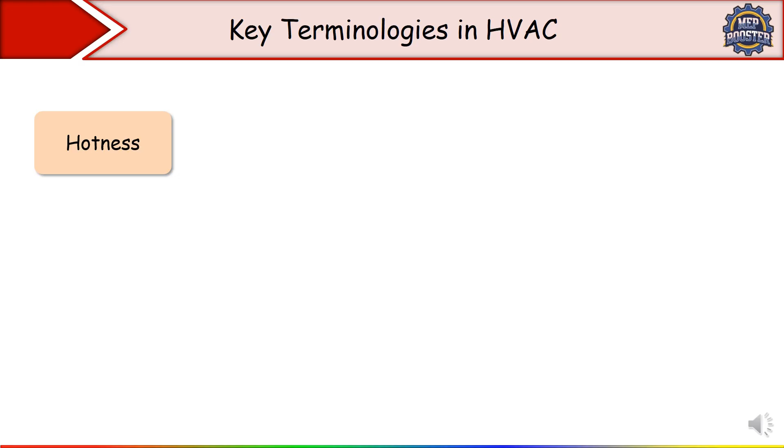Now the first term is hotness. Hotness is important for maintaining indoor climate control, ensuring that spaces do not become uncomfortably warm, especially during hot weather. Hotness generally refers to a high temperature that can affect the thermal comfort of an individual in a given environment. It is a subjective perception of temperature, usually associated with temperatures significantly higher than the average comfortable range, typically around 68 to 72 degrees Fahrenheit or 20 to 22 degrees Celsius.

Let's see an example of hotness in HVAC. Consider a commercial office building during a summer heat wave where the outside temperature reaches 95 degrees Fahrenheit. Without adequate air conditioning, the indoor temperature can rise quickly, leading to discomfort for employees. So if you are using the HVAC system, it is designed to maintain indoor temperature around 72 degrees Fahrenheit for human comfort.

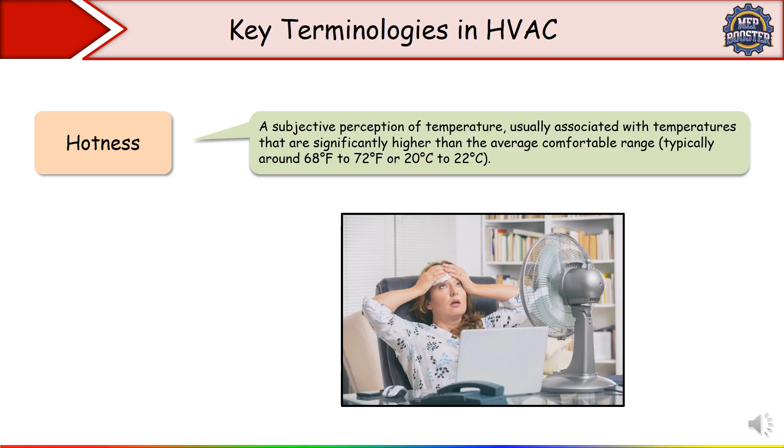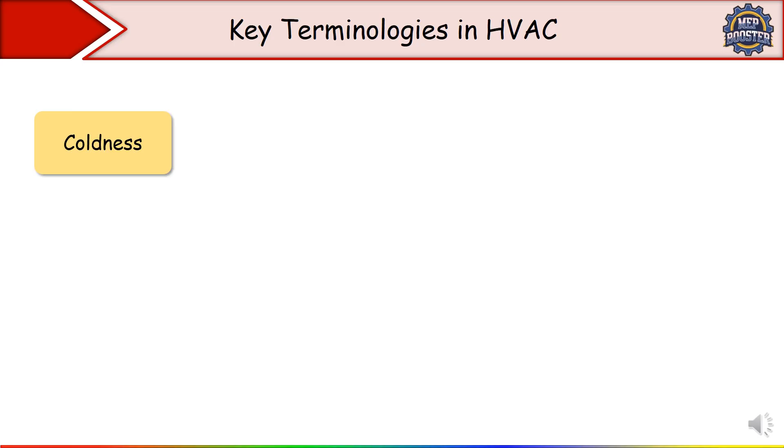Now the next term is coldness. Coldness refers to a low temperature that can affect thermal comfort and indoor climate. It is a subjective perception of temperature, usually associated with temperatures significantly lower than the average comfortable range, typically around 68 to 72 degrees Fahrenheit or 20 to 22 degrees Celsius.

Let's see an example of coldness in HVAC. Consider a residential building in a region where outdoor temperature drops to 30 degrees Fahrenheit, which is minus 1 degree Celsius, during winter. Without adequate heating, the indoor temperature can also drop, leading to discomfort for residents. So the HVAC system is set to maintain an indoor temperature of 70 degrees Fahrenheit, to maintain a comfortable environment in the room.

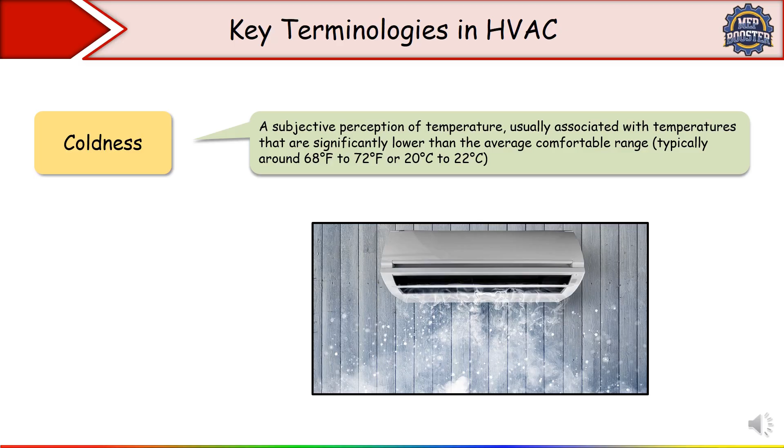Now the next term is humidification. Humidification is the process of adding moisture to the air to increase relative humidity. This is essential in climates where air tends to be dry, as it helps maintain comfort and prevent respiratory issues.

The best example of humidification: in winter, when indoor air can become very dry due to the heating system, a humidifier may be used to increase humidity level from 20% to a more comfortable 40%, reducing dry skin and respiratory discomfort.

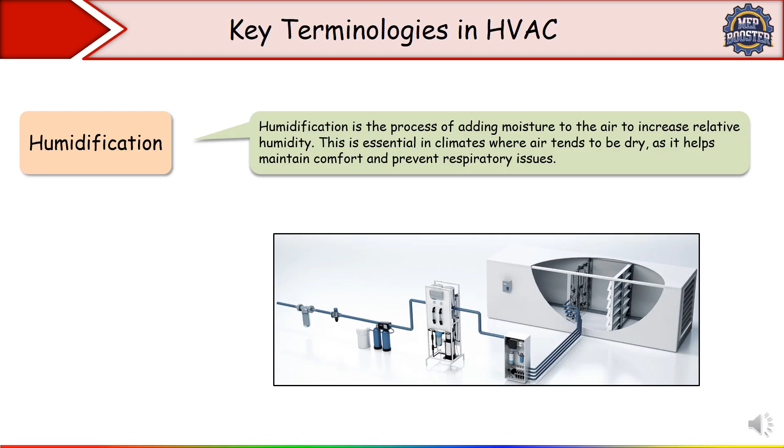Next term is dehumidification. Dehumidification is the process of removing moisture from the air to decrease relative humidity. This is important in humid climates to prevent mold growth, condensation and discomfort.

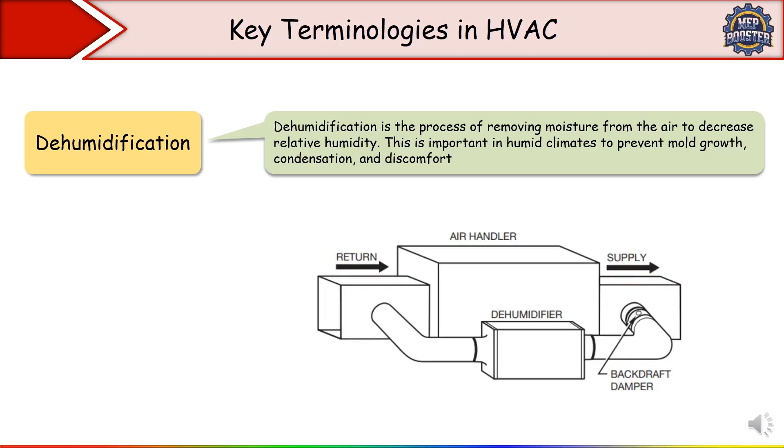In a humid climate, a dehumidifier is used in a basement to reduce humidity level from, let's say, 70% to 50%, helping to prevent mold and improving overall comfort. So this is all about dehumidification.

Now the next term which we have to discuss is evaporation. Evaporation is the process in which liquid water turns into vapor. It occurs when molecules at the surface of the liquid gain enough energy to escape into the air, and this process cools the surrounding environment.

Let's see one example. When sweat evaporates from the skin, it cools the body. So if the temperature is 85 degrees Fahrenheit and the relative humidity is low, the body feels cooler due to the evaporation of sweat.

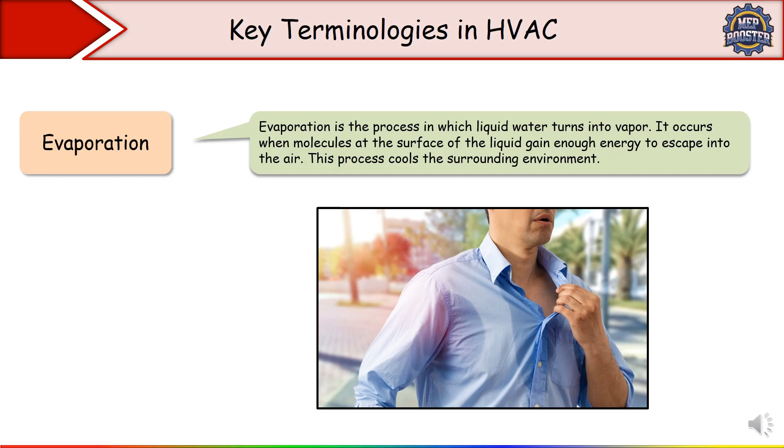Now the next term is condensation. Condensation is the process where water vapor in the air turns back into liquid water. This usually occurs when the air cools to a temperature below its dew point.

Suppose, for example, when warm, humid air comes into contact with a cold surface, like a glass of iced water. What happens? Water droplets form on the outside of the glass. This is condensation, which happens because the air near the glass cools and cannot hold all the moisture it contained. This is the best example of condensation.

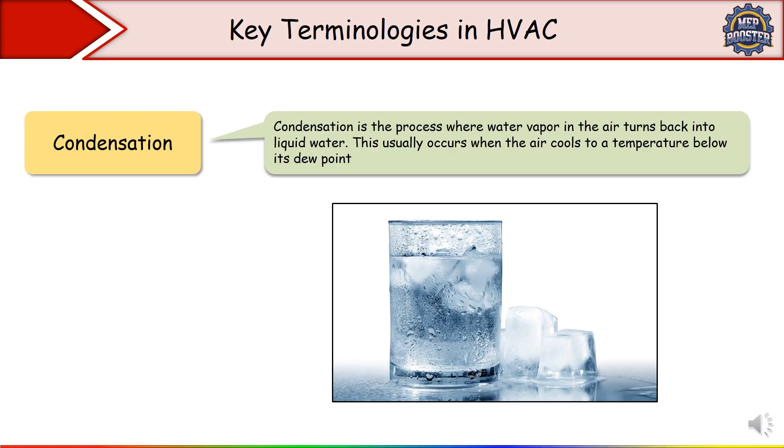Now what do you understand by boiling temperature? Boiling temperature is the temperature at which a liquid turns into vapor. This temperature varies based on atmospheric pressure.

For example, suppose water, we know that water boils at 100 degrees Celsius at sea level. However, at higher altitude where atmospheric pressure is lower, water boils at a lower temperature, for instance, 200 degrees Fahrenheit at an elevation of 6000 feet. So that is the example of boiling temperature.

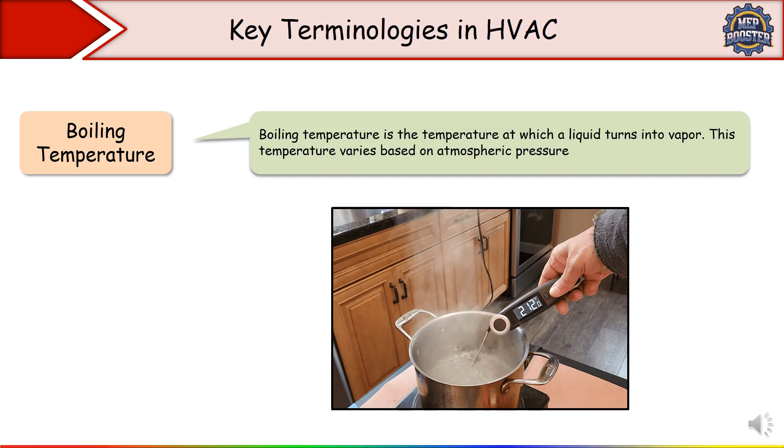Simply put, boiling temperature is the temperature at which a liquid turns into vapor. We know that the boiling temperature of water is 100 degrees Celsius. So after 100 degrees Celsius, it will convert into vapor form.

Next is the dew point temperature. What is it? Dew point temperature is the temperature at which air becomes saturated with moisture and water vapor begins to condense into liquid water. So it is a direct measure of humidity in the air.

For example, if the air temperature is 75 degrees Fahrenheit and the dew point is 65 degrees Fahrenheit, the relative humidity is high. So if the air cools to 65 degrees Fahrenheit, condensation will begin, resulting in dew forming on surfaces. So the temperature at which condensation starts is called the dew point temperature.

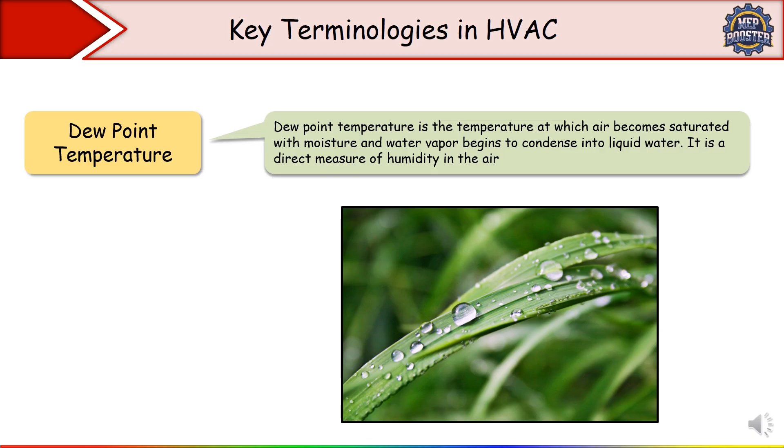Now the next term is absolute humidity. What do you understand by absolute humidity? The total mass of water vapor present in a given volume of air is called absolute humidity, and it is expressed in grams per cubic meter.

Example, if there are 10 grams of water vapor in 1 cubic meter of air, then the absolute humidity is 10 grams per meter cube. Simply in this way you have to calculate the absolute humidity.

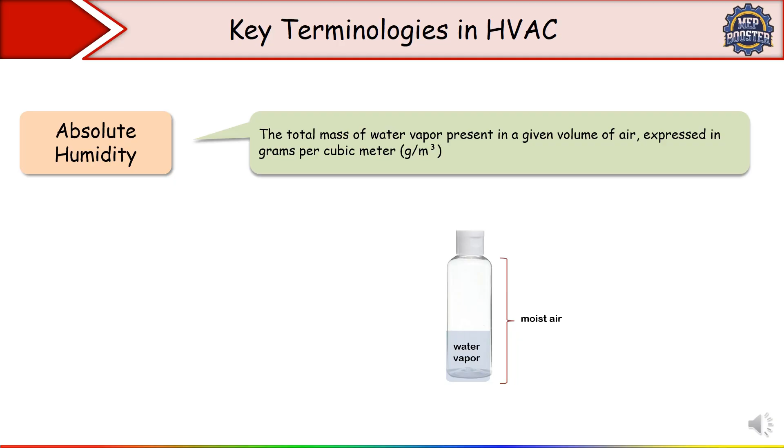Next important term is relative humidity. Relative humidity is the percentage of moisture in the air compared to the maximum amount of moisture the air can hold at a given temperature. That is called relative humidity.

For example, if the air can hold 20 grams of moisture at 70 degrees Fahrenheit and there are currently 10 grams of moisture in the air, then the relative humidity is 50%. Simple.

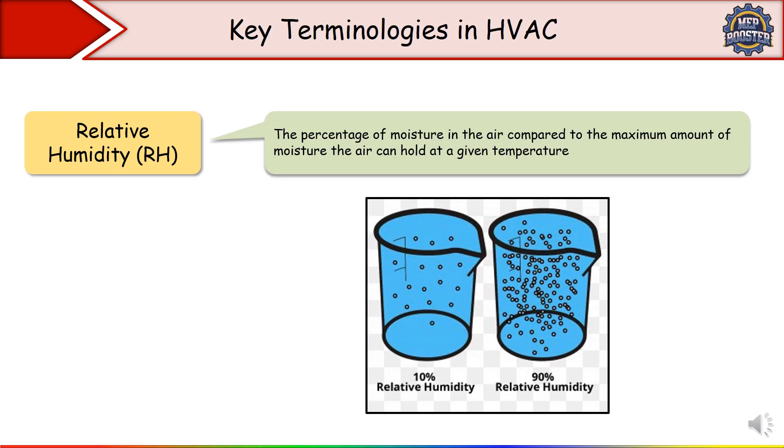Now let's see, the next term is specific humidity. Specific humidity is the mass of water vapor per unit mass of air, typically expressed in grams of vapor per kilogram of air. That is called specific humidity, and it is also called the humidity ratio.

For example, suppose if there is 5 grams of water vapor in 1 kilogram of air, then the specific humidity is 5 grams per kilogram, because the mass of water vapor per unit mass of air is called specific humidity.

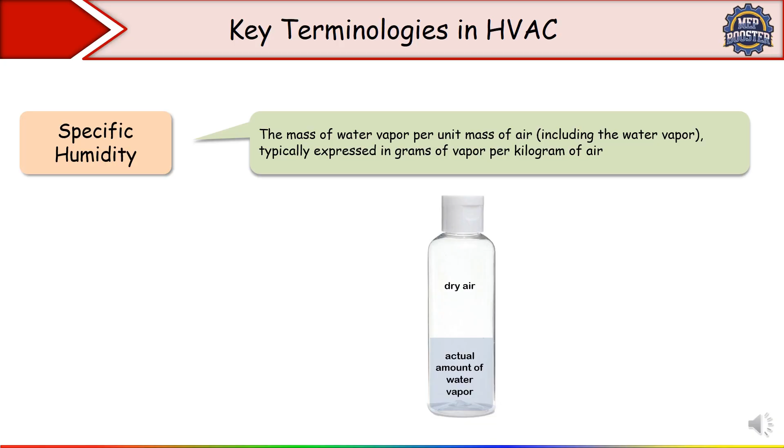Now the next term is ton of refrigeration, in short TR. What is this actually? A ton of refrigeration is a unit of measurement used to describe the cooling capacity of an air conditioning system. It is defined as the amount of heat needed to melt 1 ton, near about 2000 pounds of ice, in a 24 hour period, equivalent to 12,000 BTU per hour.

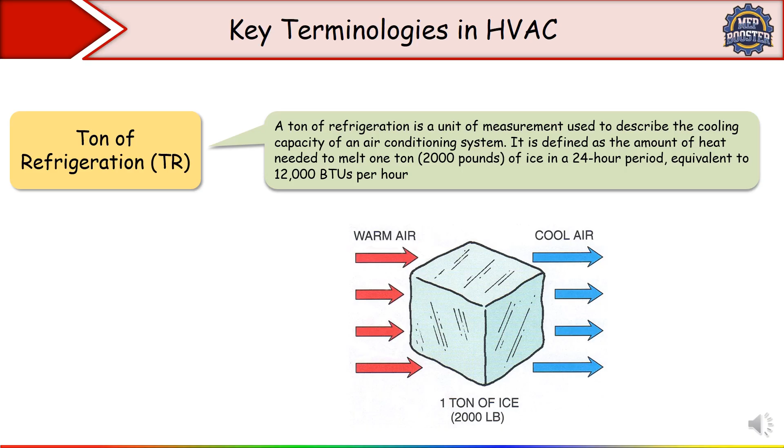So let's take an example so you will understand. For example, we have an air conditioning unit rated at 3 tons. It means an air conditioning unit rated at 3 tons can remove 36,000 BTU of heat.

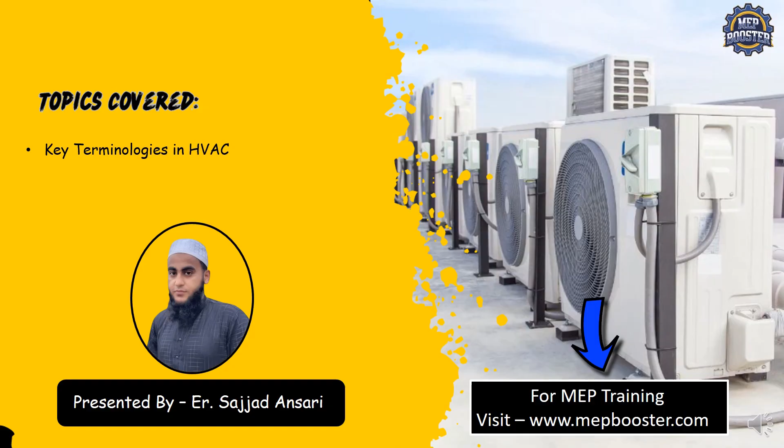So the topics which we have discussed in this lecture are key terminology in HVAC. This is all about the key terminologies used in HVAC systems. Hope all of you enjoy this session. See you in the next one.